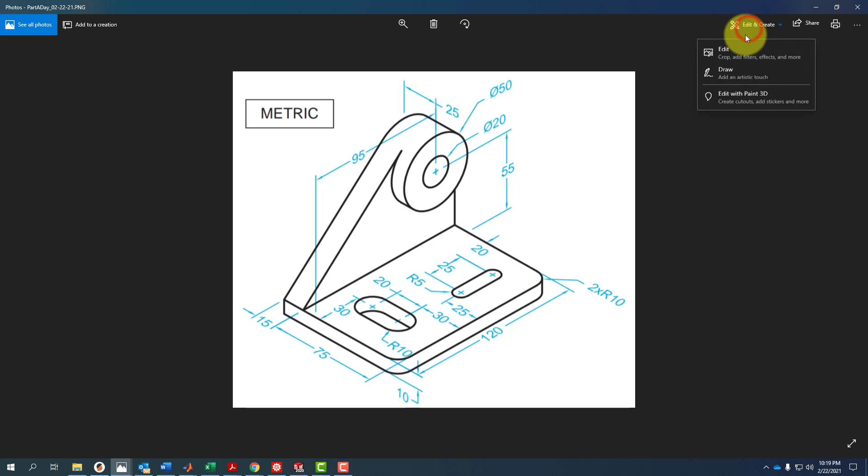So this is the part we're going to make today, and we see a couple things that we're told: that we're going to be using metric dimensions, and we have a fairly straightforward base, and we have this section here, and the circle is going to be tangent to both this surface and the downward surface.

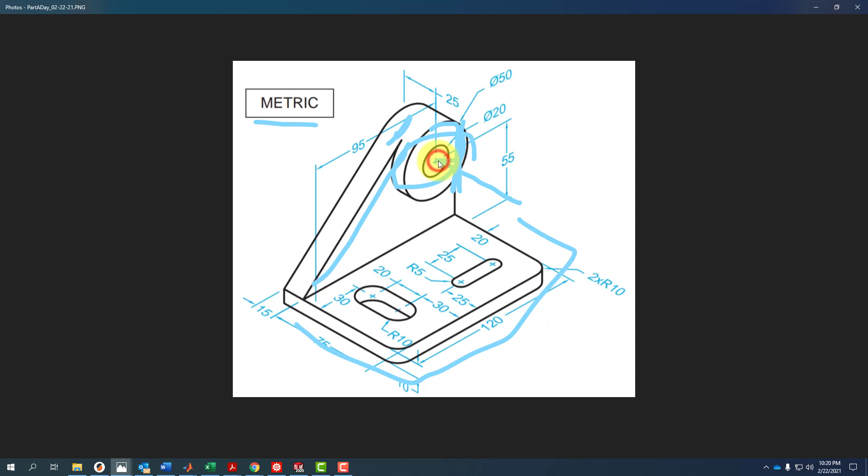We're going to assume that this hole goes all the way through and that these two slots, well, this one we can see goes all the way through. This one in the isometric view, we can't see that it goes all the way through the part, but we'll make that assumption. All right, so let's go ahead and jump into this part.

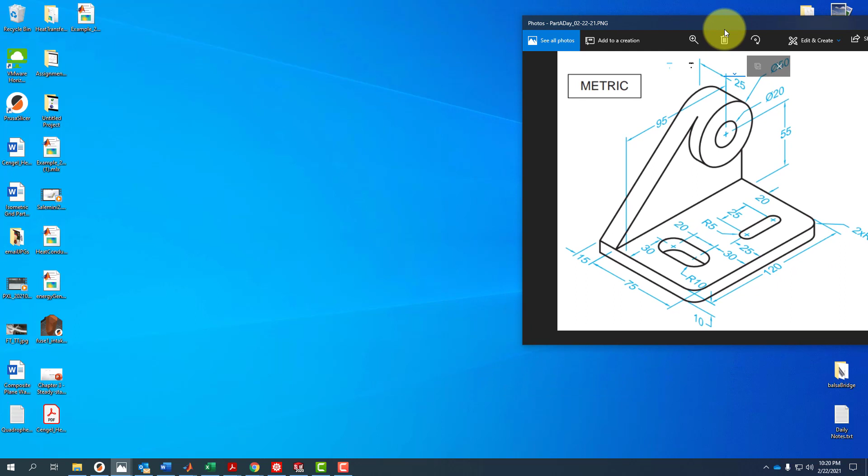And again, there's many different ways to make the part. Typically we would either make the base or we would make the back wall. Either way works. I'm going to start with the back wall. So let me go ahead and open up SolidWorks here. I need to change my units to millimeter gram second. And let me shrink myself down here so we can see what we're doing.

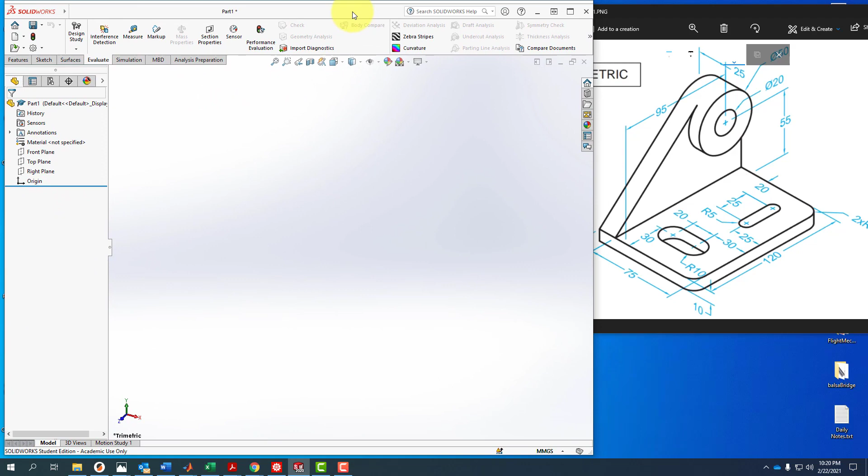And so we're going to sketch this, and this is going to be on the right face because, again, this is the front face that we're looking at over here. So this is the front direction, and this is going to be the right direction. So I'm going to go ahead and create a sketch. I'll make my sketch on the right plane.

Now we have a 120 dimension here that gives me the full width, and the total height here is not expressly given, but we're given that the height of this circle is 55. So that's what we're going to locate. So I'm going to draw a line that goes from here over, and I'm just going to drop that there, and I'll make that dimension 120 millimeters.

Okay, so now I know that there's going to be a circle up here, so let me go ahead and locate that circle. The height of the circle is 55 millimeters up, and we have it over 95 from this side. And again, depending on which way you pull this dimension, you get different orientations, either vertical or horizontal or an aligned dimension. All right, so let me get rid of that little window there.

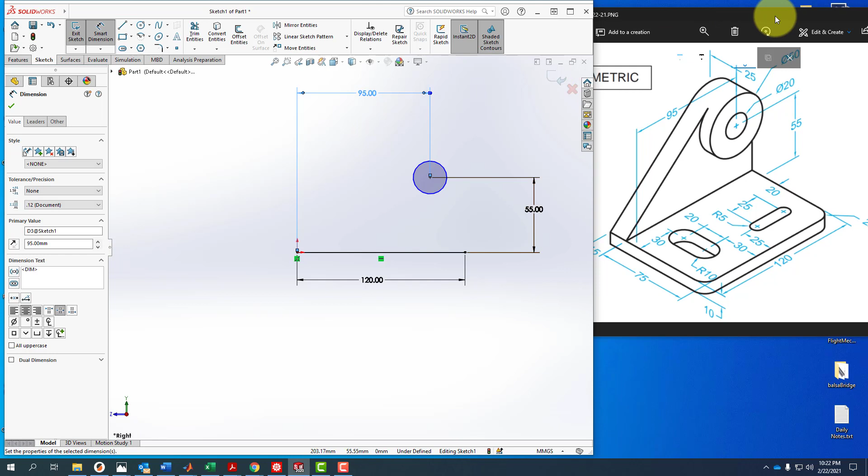So we're told that the outside diameter of this circle is 50, and the inner diameter is 20. So let's just drop another circle here, and we can dimension these. So this one is going to be 50, and this one's going to be 20. And we're not going to utilize all these sketches right away, but because we can reutilize sketches, we might as well put them in right now.

And once we do this, we'll see that this line over here is actually going to come right up and snap to that quadrant. And then we need to come over, but we're not going to go all the way down. We have to come up the distance of the height here, which is 10 millimeters. So let me come up a little bit. I don't really care how far I'm coming up right now.

And then I'm going to drag my line over, and if I'm careful, I can drag, and there, if you see it, is my coincident and my tangent constraint. So I want to put both those on there. So now my dimension is 10 millimeters. So let me go ahead and put that in, and this should lock everything down. But it doesn't. So what's going on here?

Well, let's take a look at this line. If I drag the line, nothing happens. What happens if I try to drag it up and down? Well, I thought I got my coincident there, but I didn't. So let's go back and drag it back there again. And now I have my coincident.

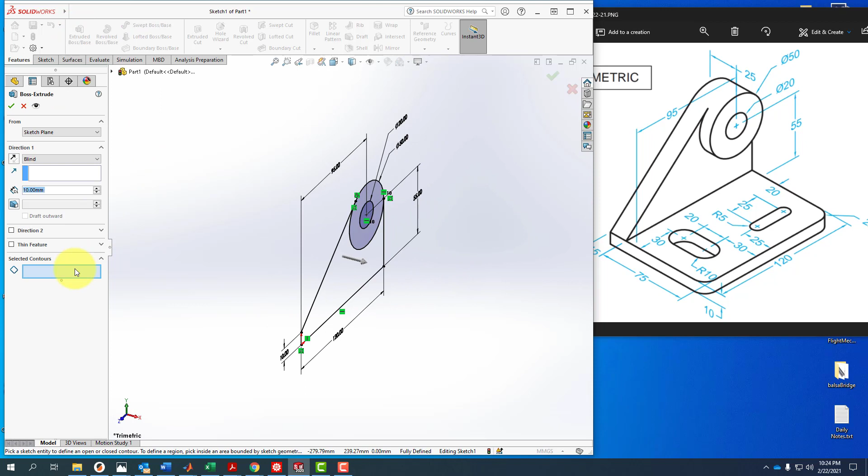So let's go ahead and go to Features, Extruded Boss, and it's going to ask me to select what contours I want. So I'm just going to select the circle contour. That's going to extrude the entire circle, and I'm just going to select in here to get the main part. The extrude distance here will be 15 millimeters. And that gives me my basic part that I'm going to work with.

Now, to get these other features in here, I'm going to open up the Boss Extrude. Now I'm not right clicking, I'm just selecting the sketch to make it active. And now I'm going to go back to my extruded boss, and basically the sketch is now active again. So I'm just going to select this circle here, and now I'm going to extrude it out a distance of 25.

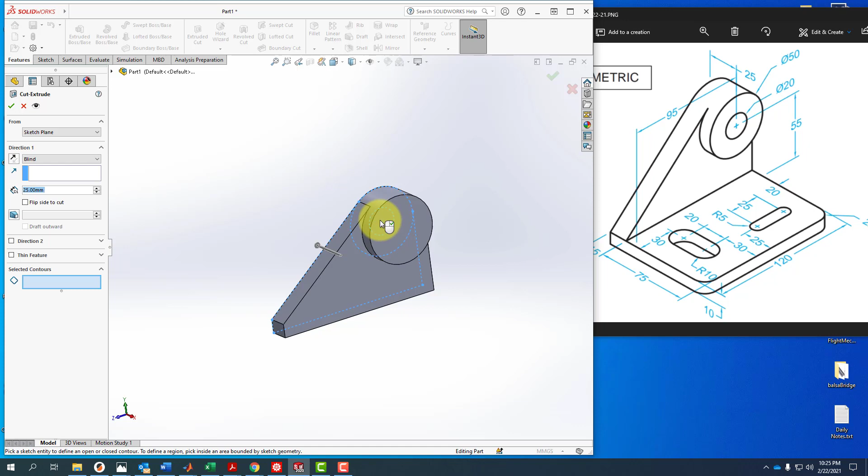So now I have that aspect of it, and now I'm going to do it one more time. I'll go to the sketch, but this time I'm going to do an extruded cut, and this time I'm just going to select the inner piece. Sometimes you might have a problem grabbing it, so you can grab it from the back, but I want to extrude it as a cut, so I'm going to flip the direction. In this case, I'm going to make it go through all. All right, so we got that. Basically, our back wall is done.

Notice on this diagram, you don't see this edge because in a typical sketch drawing in isometric view, you wouldn't see this as being a tangent edge. Of course, we could go and turn that off ourselves. Well, there's two ways of doing it. I can come up here and turn off all the edges, and we would see this in what they call shaded without the lines. And this one gives me shaded with all my edges.

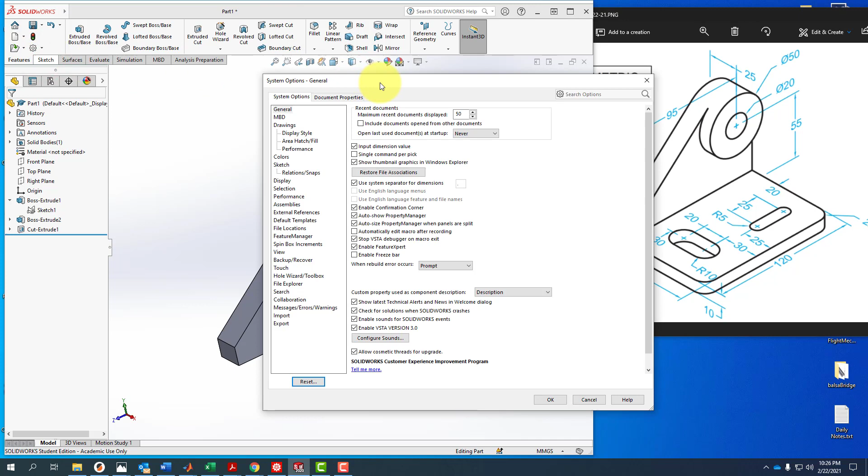But if I wanted to turn off the tangencies, we could go into our system options and select display. And up here you have hidden edges and part assembly tangent edge display. So I could remove those. I typically don't, because sometimes it's geometry that we can grab. Though, of course, you have to be very careful because if this is going to be a machine part, you can't tell a machinist to dimension something from a tangency point within the part, because it's not really findable.

All right, so let's create a sketch onto this face. I could sketch from the top plane as well, but I already have this 10 millimeter up here, so I don't have to put any dimensions on this. I'm just going to go from this point to the back corner, and we need to extrude it out a distance of 75. So I'll do an extruded boss, bring out that distance 75 millimeters.

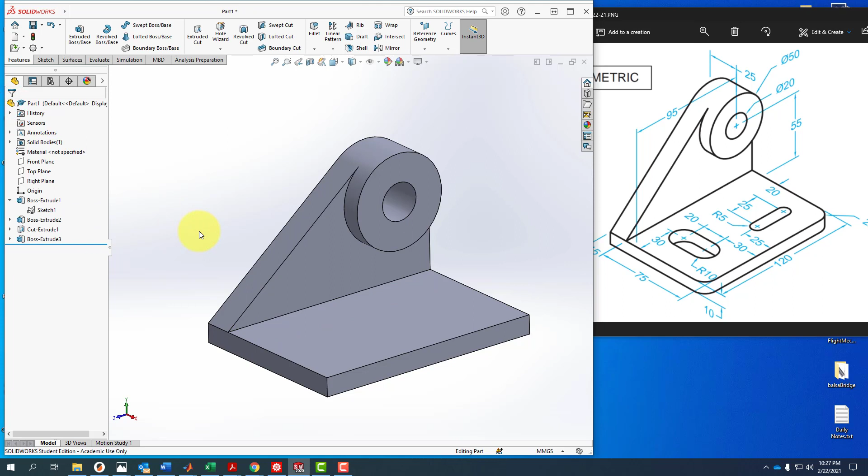And now all we need to do is add our two fillets and our two slots. The two fillets are called out here as having a radius of 10. We can put that in as a single feature. We go right into our features toolbar, select the fillet tool, items to fillet, and the radius. The radius is already by default set to 10. So my items to fillet are this edge, and rotate a little bit, and this edge.

When I'm rotating, I'm just holding the middle mouse key down, and you can zoom back and forth. You can do that all in the middle of an operation. And once I'm happy, I'll just go OK. And now with these two slots, I can again put this in as a single feature using a single sketch. So I'm going to go Sketch. I'll sketch onto this plane.

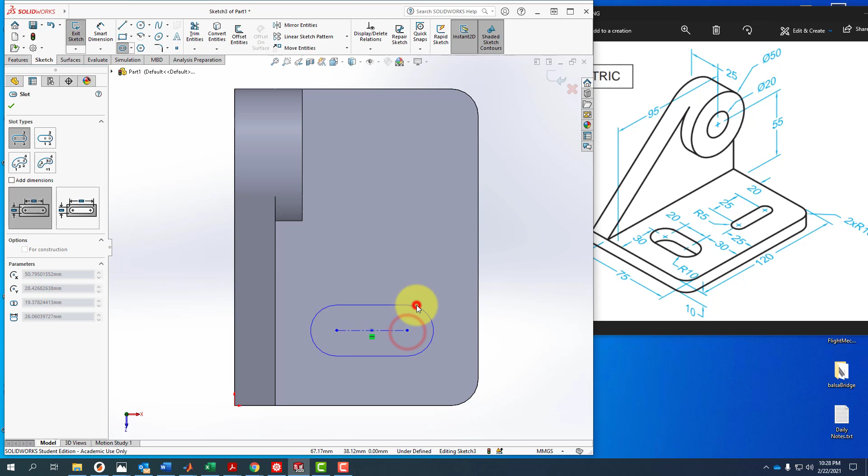And I'm going to use the slot tool. I'm not going to use a center point slot because they don't give me the center points here. I want to use the straight slot. So I'll drop a point here, make sure I get the horizontal, give myself some sort of radius, and I'll do the same thing here, making sure I get my vertical constraint.

All right, so the distance for this one is 25, so let's jump into the smart dimension. I mean the distance between these two center points, which is given by this line. So I'll select that and put that as 25. The radius is going to be a radius of 5. And we have two dimensions.

The center line distance to here is going to be 25, so I'll select this center line and the edge and put that in as 25. I didn't type it right, so let me double check. I'll double click it to get it active. Oh, it did take it as 25. And then the distance from this point, I can select from this point or from the circle, just to show you. And we get that as 20, and notice that the dimension is to the center of the circle. So that's fully dimensioned.

So now we need the distance between these 2 points, which is this line, and that's given by this 20 millimeter dimension. I'm still in my Smart Dimension tool, so I'll make that 20. My radius is double the other one, so it is a radius of 10. And my 2 distances are from the center line to this front edge. The dimension is 30.

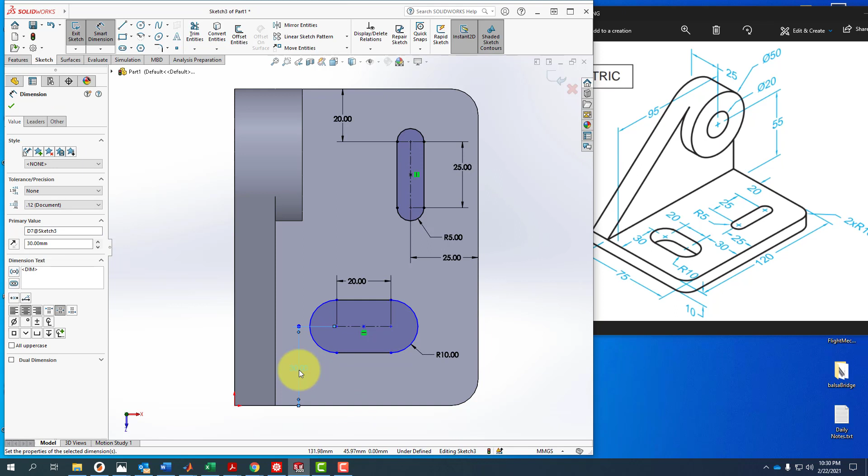And we have a dimension again from this side here, which goes from this edge, and this time I'll just choose the center point just to show you have options of doing it both ways. And this is 30. So now my sketch is fully dimensioned, and we see that again down here in the bottom as being fully defined.

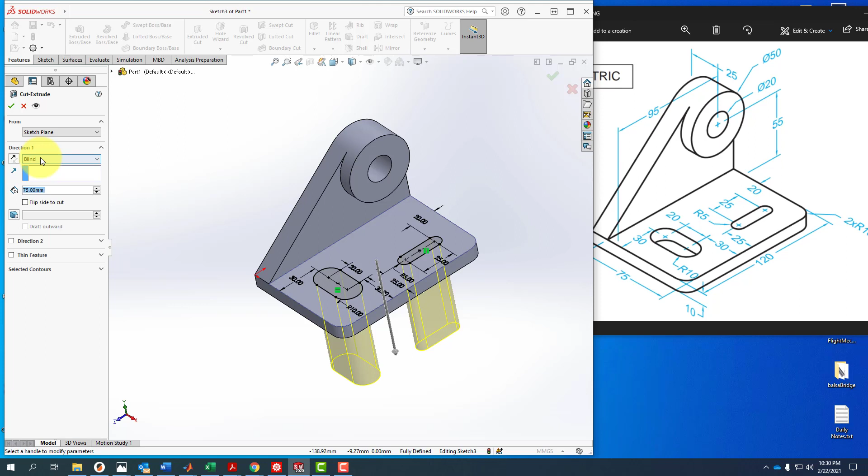And I'm going to go ahead and go Features, Extruded Cut, and instead of doing blind, we'll capture our design intent by going through all. All right, so let's go ahead and throw this into an isometric view. Up here, by the way, there are different views. There's dimetric and trimetric, which are just different orientations. But if we're trying to recreate something that's been drawn in an isometric view, we typically would want to view it in an isometric view.

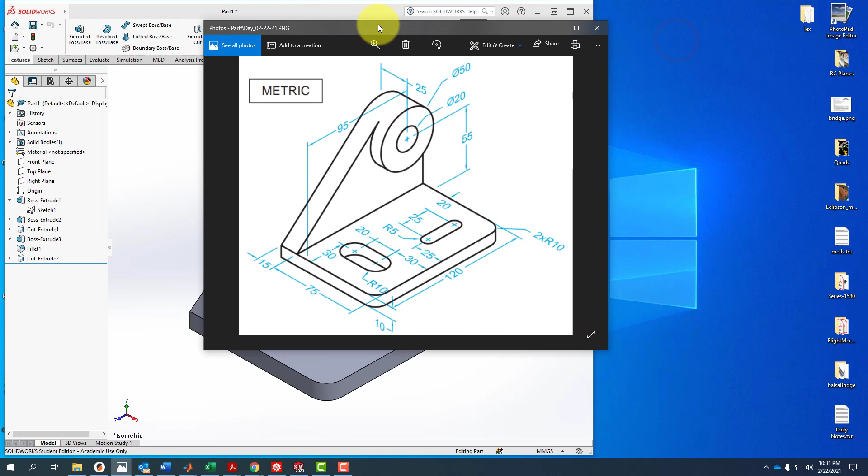Now you notice it looks a little bit different over here. So maybe we've made a mistake. Let's pull this over, and you can see what I'm saying here. I think this should be taller over here. And this is sometimes the problem with isometric drawings. I automatically assumed that this 55 was from the base, but it turns out, let me grab my little drawing tool, that this dimension is going from this point here.

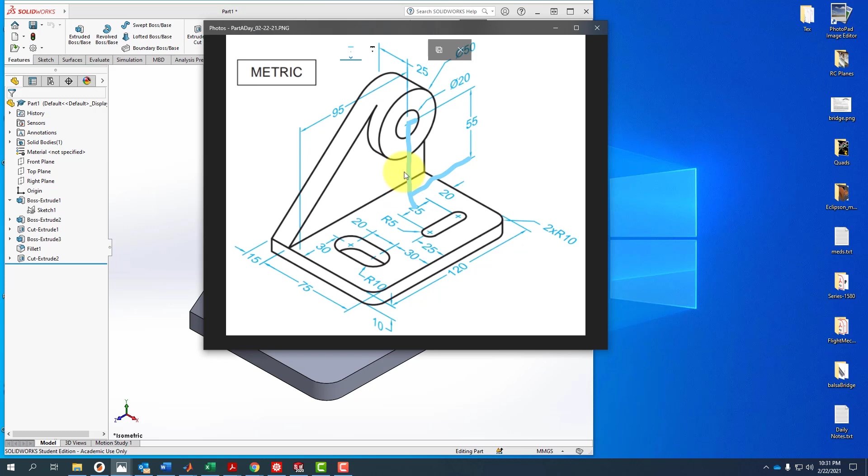So if I drag a line down and then connect this line over, you'd see that this 55 is actually from this upper surface. So I need to add 10 millimeters to that. So that's why it's good to double check your drawing. So let me go back to my original sketch. Now I can do this 2 ways, right? Oh, I have a bunch of ways of doing it.

I can right click on the Boss Extrude and edit the sketch from there. I can open up the Boss Extrude and right click and edit the sketch from there. Or I can select the sketch and it brings up all my dimensions, or I can select the Boss Extrude and it brings up all the dimensions. Lots of different ways, and all of these will allow you to access that dimension. So I'll select Boss Extrude. There's my 55 dimension that I need to change to 65. So I'll double click on it, change it to 65, and hit Enter.

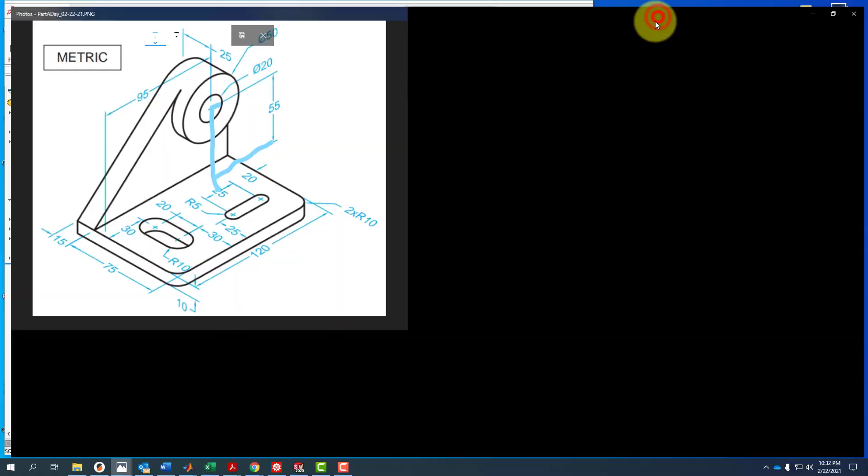Now, when you do it this way, there's nothing in here to actually say to rebuild the part. So you'll see your little stoplights over here indicating that your part needs to be rebuilt. So you can either click up here or hit Control B. So we'll go ahead and do that. And now when we put this in isometric view and compare it to our drawing, they look a heck of a lot more similar. So that's the proper way we should have modeled this. That would be a real easy mistake to make, so that's why we go back and check things.

All right, so let's go back in here. Let's evaluate our part. We'll go to our mass properties, and we have a mass of 199.68 grams, but since we haven't set a material, we typically wouldn't look at that, but we'll look at our volume and our surface area. Again, sometimes putting something in cubic millimeters is a pain in the neck, so we can go up here under Options and use some custom settings where, instead of millimeters, we could do it in cubic centimeters.

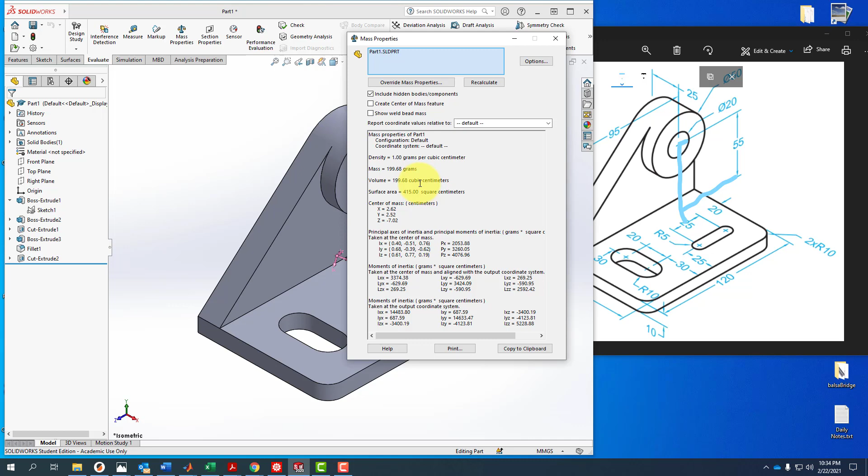And if we do that, now our surface area is 415 square centimeters, but we're still in cubic millimeters. So we go back up here to the part unit volume, and we can again do it in cubic centimeters. And now we're not dealing with cubic millimeters, which sometimes gets a crazy large number. You could also do it in cubic meters as well, which would be a standard way of looking at it.

Now, if we want to actually put a material on this so we can get the mass, we can just come over here to Material and right-click. Well, you have 2 options. Well, it won't let you do anything until you close the Mass Properties window down. So I'm going to right click on material. Now there's a couple materials that you can just pick right away. Like I can just say I want my part to be made of copper.

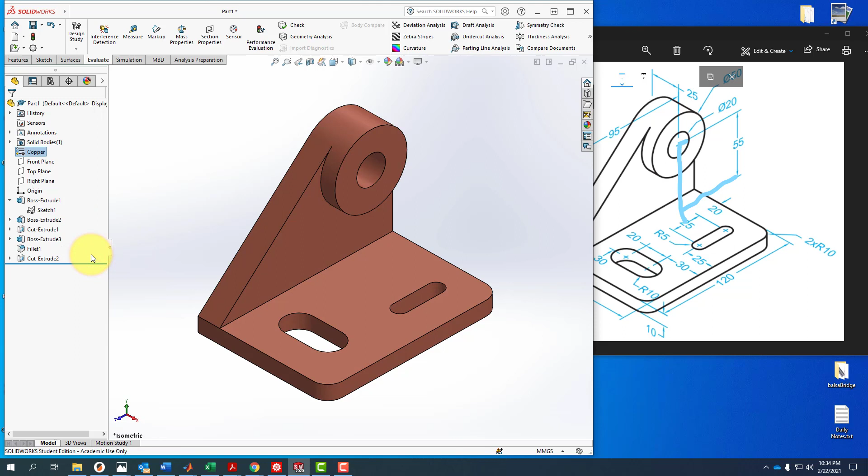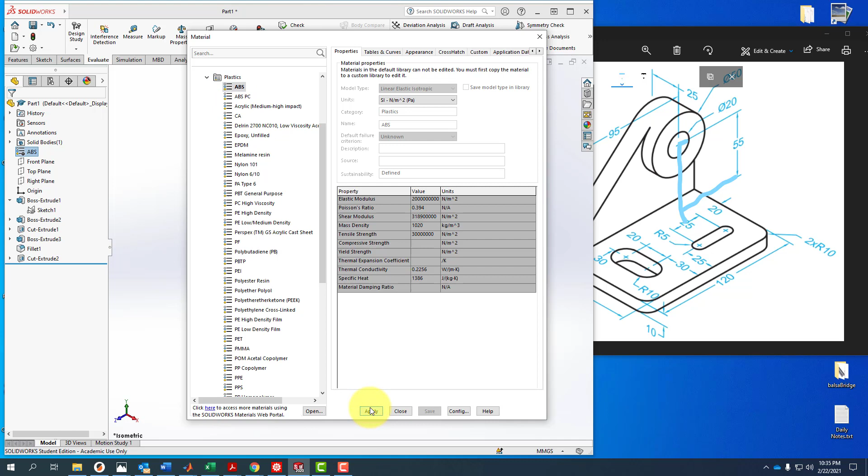Or we can go in here and select edit material, and you have a bunch of preset materials in here. Steels, irons, aluminum alloys, copper alloys, and titanium. We have plastics here, so we could make this like an ABS plastic. And I can say I'll apply it. And then I have to close my window, so it shows up as a generic white. And now I can go back and take the mass. So if I was going to print this using a 3D printer in ABS plastic, assumedly a solid print, this would now have a mass of 203.67 grams.